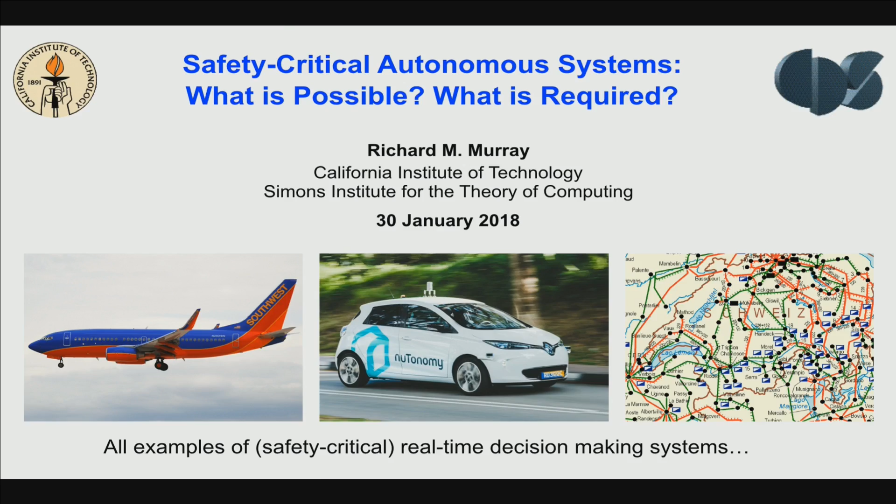I want to talk a little bit about these, and for me, part of the motivation — those of you who've seen me speak before have heard me talk some about this — was the DARPA Grand Challenge that happened back in 2004 to 2007, which Caltech participated in with a bunch of undergraduates.

The Caltech undergraduates built this vehicle. They built several — this is Alice. Actually the first vehicle was Bob. Alice is an autonomous vehicle originally built for off-road driving, although we also used it for urban driving. It was built by 75 Caltech undergraduates from scratch in about a year and a half. This shows what could be done back around 2006, probably when this picture was taken. It consists of lots of sensing, lots of computing, lots of communications, all integrated together, lots of different programs running in a very complicated setting.

It is the precursor, or one of the precursors, to what we see now today. Many of the DARPA Grand Challenge veterans and alumni are the people sitting in the self-driving car companies, getting all of these things to work and bringing that experience with them.

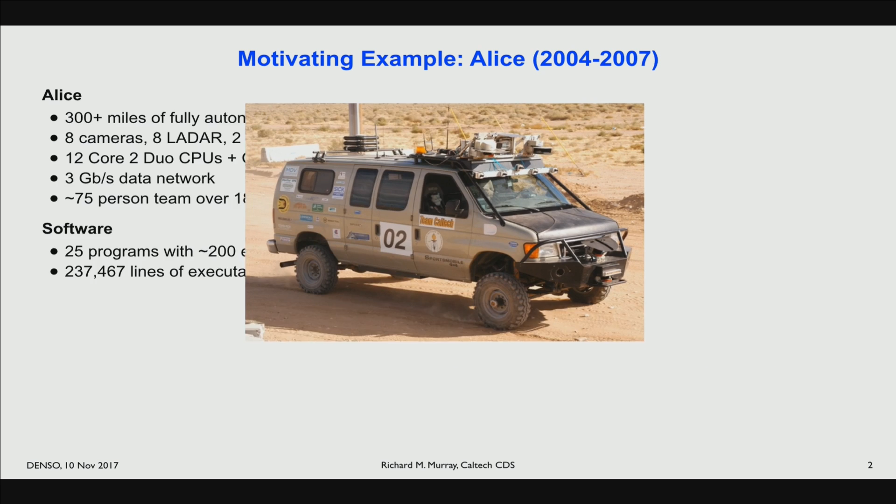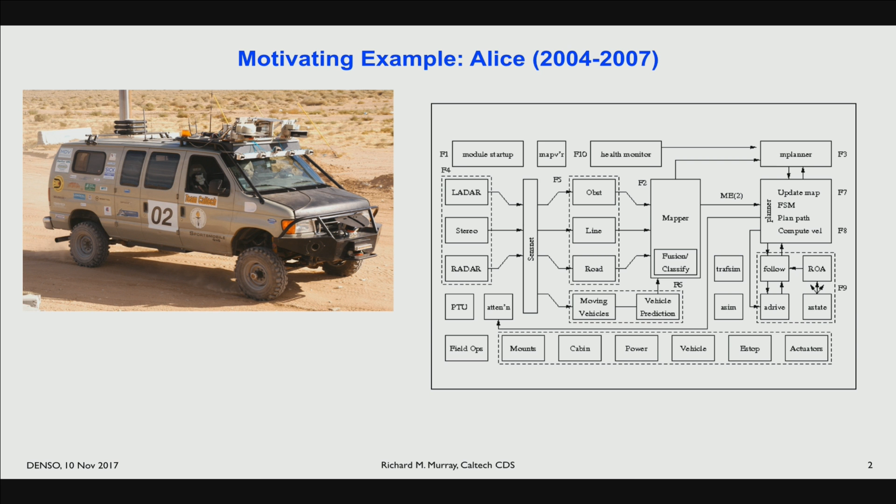So if you look inside Alice, you would see a bunch of modules running on computers. Each of these little boxes — don't worry if you can't read the words — represents some function being carried out, either sensing, navigation, decision making, or other things, all connected together, all running across 30 cores or so worth of computing and carrying out all of these computations.

This is very similar to the architectures you'd see in today's self-driving cars driving around downtown San Francisco and other places. They all have a similar setup, with lots of different computation running now on much more advanced CPUs, but still basically the same ideas. What amazed me at the time was that all of this can actually work. We actually know enough about how to get these to run.

This is an example of what Alice looked like as it was driving along. You're seeing it driving in an intersection, coming up to that intersection, waiting until it's its turn, so it has to sense those other vehicles and determine that it's now its turn to go. It goes through the intersection. It doesn't know exactly where things are, so it has to localize, figure out where the lane lines are and other things. It has no prior map, since this was before things were mapped in exquisite detail. That wasn't part of the rules, so you see it veering around a little as it tries to figure out what's going on.

It comes up to another intersection, stops a fair distance behind as set by the rules, and waits until it's its turn to go. As soon as that car goes through, it says, great, I can now pull up to the intersection, stop at the stop line. It knows the other car was there first, waits until it goes through, and then it goes through the intersection.

All of this is running with nobody in the car, having to figure out where all the lane lines are, where all the other cars are, sensing everything around it and doing real-time decision making about how to make all of those things happen. In that particular spot, you saw it doing some relatively simple maneuvers - certainly all of us could do that if we were driving a car. But now, of course, it's doing that all autonomously and working more or less correctly. You can improve the performance and other things, but it basically did what it was supposed to do. But it didn't always do the right thing.

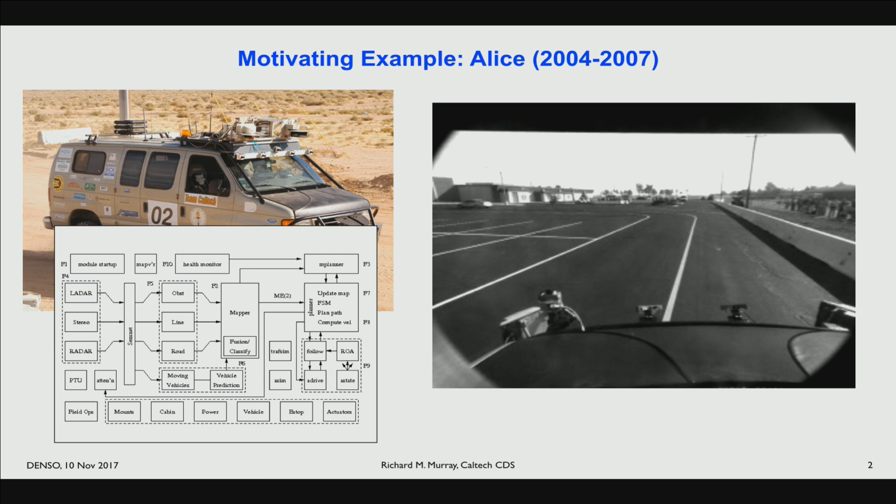What's very interesting is that if you go over to this diagram, you can say, well, something went wrong - there was a bug someplace. In fact, the bug was that there were inconsistent assumptions between two different layers of abstraction, where a higher layer thought one thing was going on and a lower layer thought something else was going on, and they got inconsistent and the system got confused. I'll explain a little more what those layers are and what was going on.

But essentially, we missed it. We did lots of driving, lots of testing, lots of simulations, but there was this one condition we'd never seen before that somehow caused the system to get confused. In a safety-critical control system, that's what you're worried about - that one condition in a million that's going to happen. You have to simulate a lot in order to get that condition, and you may never get it. That was the type of thing we were looking at.

And to me, at that time, that really motivated thinking about how in the world are we going to design these sort of complex systems and get them to work. So how do we design systems of this complexity? How do we make sure they function as they're desired?

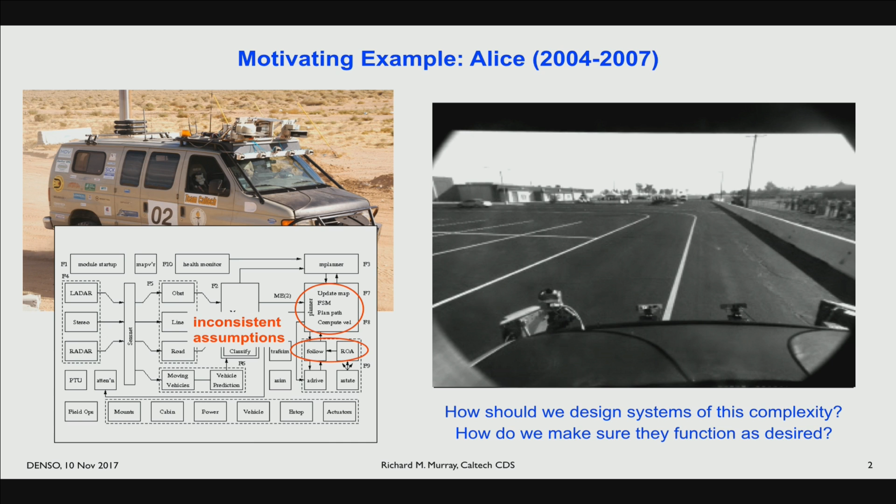Let me generalize that a little bit and talk about safety critical autonomous systems, mainly autonomous vehicles, but as I said, the power grid and other things might be there. And I think one question we should ask is, how safe is safe? How safe do we need things to be?

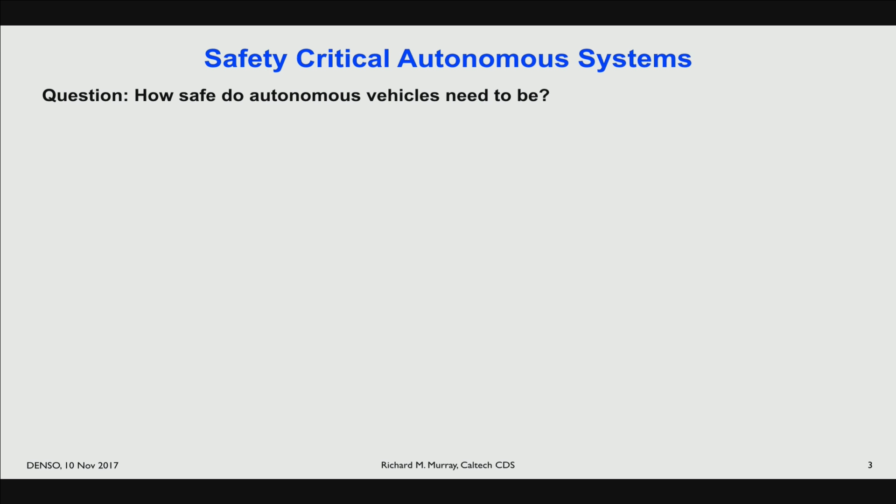So, for example, we can look at what some of the statistics are on safety in the current systems that we have. Vehicles, human-driven vehicles, the safety record is about 7 deaths for every billion miles driven. That's about what a human can do right now. Traffic deaths due to an accident, either of the people in the car or people around the car.

So that seems maybe pretty safe, right? Nobody here drives a billion miles. So 100 million miles, you would kill less than one person. But there are a lot of miles driven. So in the United States, that turns out to be 35,000 traffic deaths per year, just in the US, because there are that many miles driven. And that's certainly way too many - a leading cause of death, in some sense, up there on the list of things that kill people.

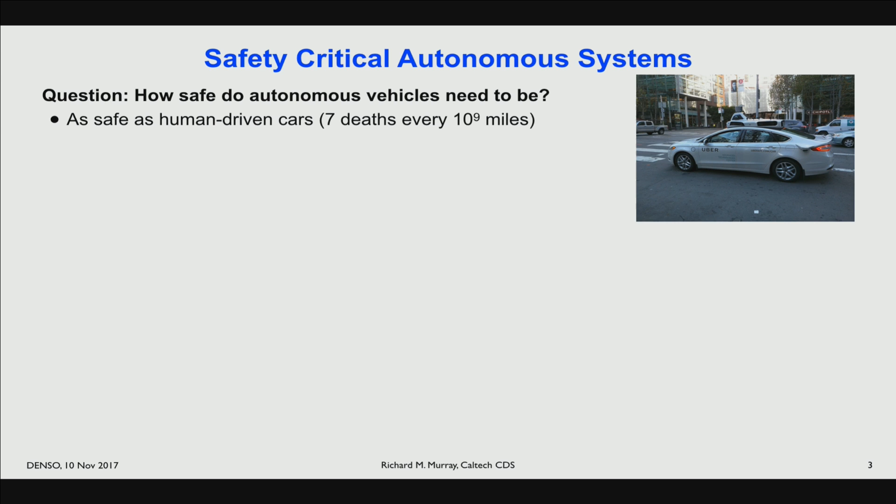So are there safer ways? Well, you can look at what happens in train and rail types of systems, something like the San Francisco Metro as an example. Buses and trains turn out to be about 20 times safer - 0.1 to 0.4 deaths per billion miles driven. Really quite a lot safer than driving yourself.

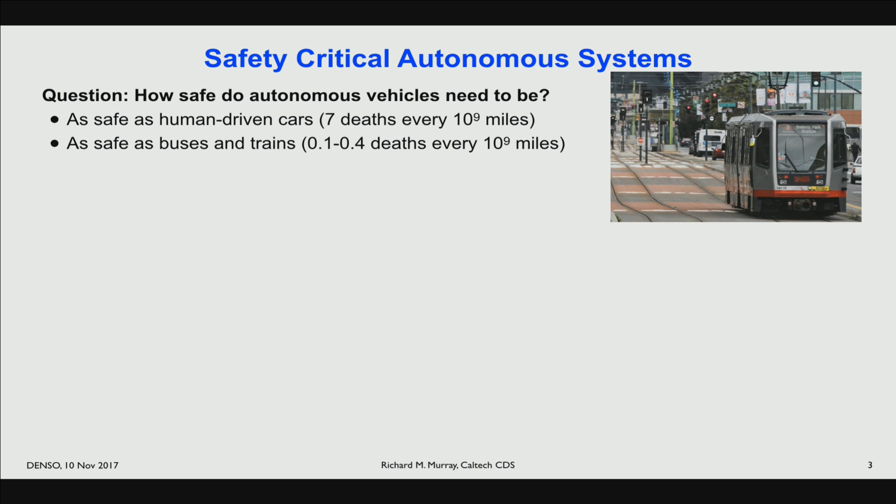But the safest mode of transportation, maybe not too surprisingly, since this is the one we hear the least about people getting hurt in, is in fact air transportation. And the statistics there are 0.07 deaths per billion miles. It's 100 times safer for me to fly from Pasadena up to Berkeley than it is for me to drive that same distance. So if you want to go down to LA or up to San Francisco, you should fly if you're worried about your safety, because it's 100 times safer to do that.

And these statistics come from this paper. It's a little bit dated now, but it goes through all of those things. And this is US data. So I think we can ask a couple of things about that. How is it that in the aerospace industry, we're able to make things so safe? What's going on there?

I think there are a couple of things. One is that there are very strong certification requirements. You can't just put software in an airplane and try it out - you actually have to go through a certification process. There are many of them, but one is called DO-178C. And DO-178C establishes how safe, as an engineer, you have to guarantee your software is, or demonstrate that your software is, before you're allowed to put it out in use by the public.

And there are a variety of levels of safety. So there's hazard classes and what's the software level for that, and the number of failures per flight hour. Catastrophic failure means possible loss of human life - the software does something and the plane might actually crash.

And for level A software, where the failure of that software could lead to a catastrophic error, what you have to demonstrate is you will have no more than one failure in every billion hours of operation. A billion hours of operation turns out to be 100,000 years. So every 100,000 years, your software is allowed to have a bug that trips. That's pretty damn safe. But that's what you have to demonstrate.

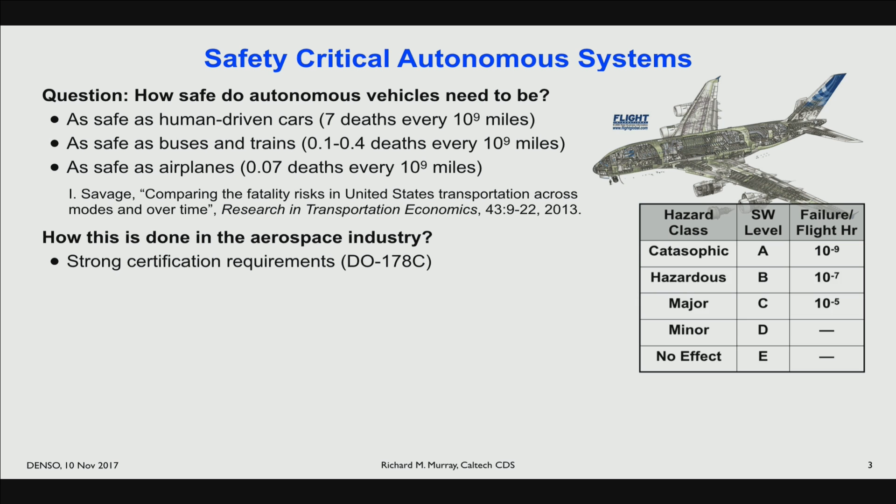And so there are a variety of processes for doing that. This DO-178C covers a lot of how you actually demonstrate that - what type of analysis you have to do, all of those things. So part of the reason that aircraft systems are so safe is that there's strong regulations around those that force the engineers designing them.

Many of these were things developed by the industry, because you obviously want airline safety to be something the public can trust. So that's kind of where we've ended up on that.

But there are other things that make the air traffic system particularly safe. It's a very structured operating environment. You have air traffic control and other things moving things around, and very well-trained personnel. A pilot gets hours of training, many hundreds of hours probably every year, in addition to flying and getting certified.

And you have very expensive vehicles. Airplanes are not cheap, maybe on the order of $1 million per passenger. So you can do a lot, and I'll tell you some about what those things are.

So if we think about it, it's possible to design these systems to be that safe. We've demonstrated we can build them that safe. How might we do that in the automotive industry? Can we get to that level of safety?

At the component level, things are actually pretty good. Your car components don't break in a way that causes death very often. Most deaths are caused due to the humans driving them making a mistake, not due to your engine going out or your tire going out or something going out inside your car. Sometimes, but not that often.

If you start thinking about autonomous vehicles, right now a lot of the backup that happens when you have a failure is the human. Oh, my tire went out, I need to pull over to the side of the road. Oh, my engine stalled, I need to figure out a safe path, all of those things.

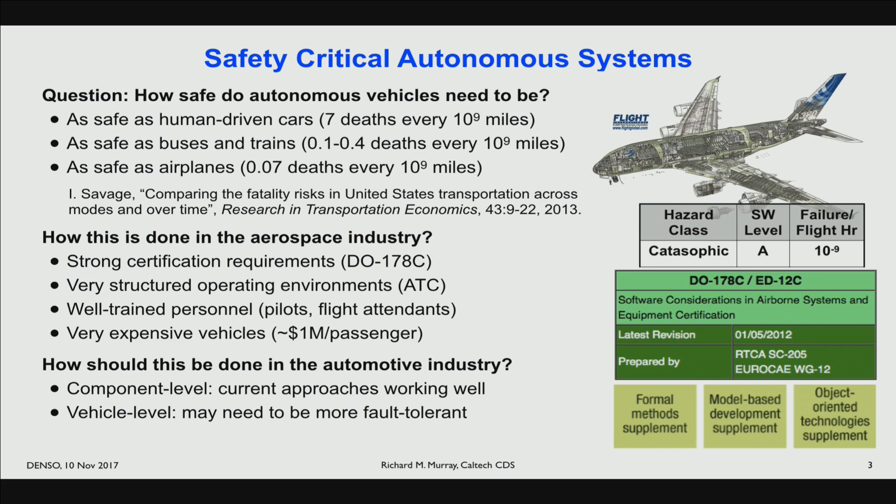So as we start doing that in autonomous vehicles, at the vehicle level we're going to have to be a little bit more fault tolerant. Most of the autonomous cars out there driving right now are designed to drive when all four wheels are inflated and the engine's running and the brakes are working and the transmission's working and the communication systems are working and the networks are working and the computers are working, and all of that stuff.

So we're going to have to say, okay, what if that's not all the case? Your aircraft can run on one engine, actually they run on zero engines for a little while. So they've thought about how do you run in fault conditions, not how do you just say, okay, it's a fault condition, I give up, everybody's dead, or it's a fault condition, pilot, figure it out. The aircraft can actually still continue to operate.

And I think the hardest thing we're going to see in automotive systems is at the system level, when you're around people and it's a mixed environment and all of that stuff is going on. That's going to be the really hard problem where I think we have very hard challenges.

So these are the types of things I've been thinking about for the last couple of years, in some sense motivated by the DARPA Grand Challenge, but increasingly for me it's been more on the aerospace side that we've applied some of the ideas I want to tell you about.

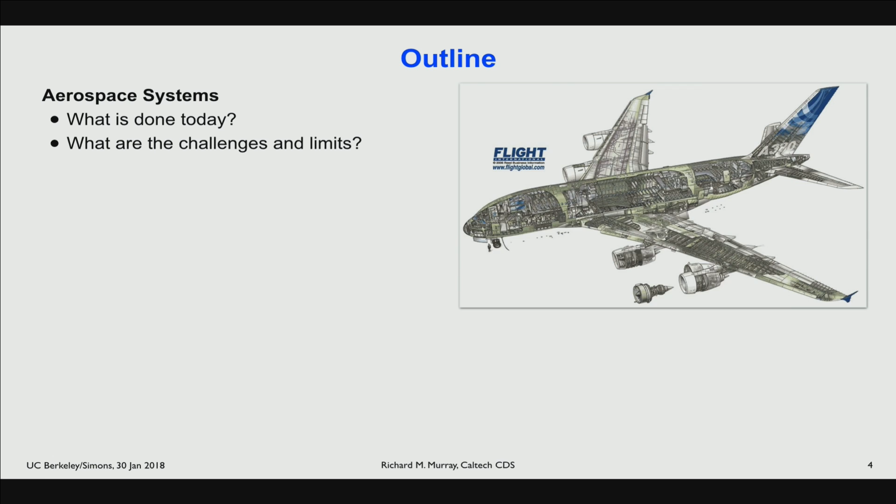So what I want to tell you about today is a little bit of that. I'm going to start by telling you more about aerospace systems, how things are done there, and what are some of the challenges even in aerospace systems that we're working on. I'll give you a sense of some of the ideas mathematically and in control theory, which is my field, and what tools and techniques we can apply. It's a very nice combination of ideas coming from computer science, controls, and many other disciplines.

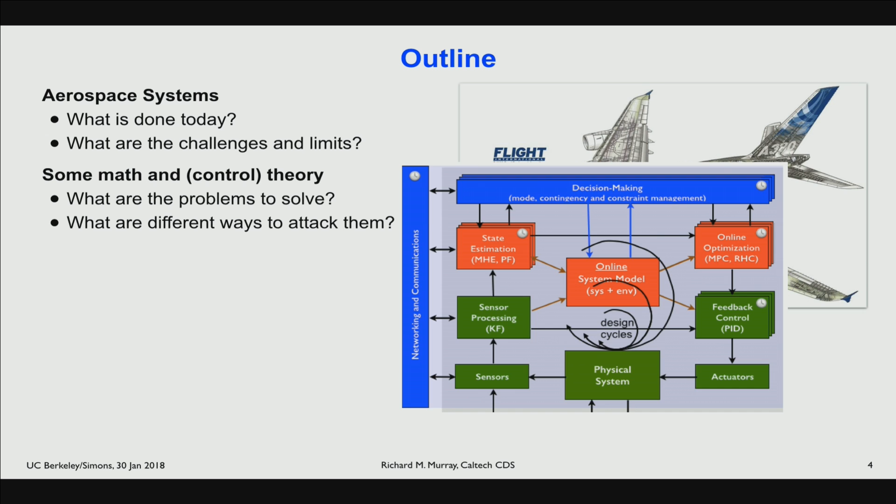And then at the end of the talk, I'll try to come back to self-driving cars and talk about whether these ideas can be applied, should they be applied, how might they be applied, what does that look like. Because this is an area that's changing very rapidly. Since 2007, there have been dozens of companies that have come out that are now building these cars.

I'd like to point out that a lot of the work I'm going to talk about today is tied to things going on here at Berkeley. In particular, a lot of the aerospace stuff is from the iCyPhy project, done with Edward Lee and Alberto Sangiovanni-Vincentelli. And a lot of the self-driving car work is stuff we've just started in the last year or so with Sanjit, Claire, Ruzena Bajcsy, Shankar Sastry, Tom Griffiths, and Bjoern Hartman here at Berkeley. So this is very much joint work with many people around here.

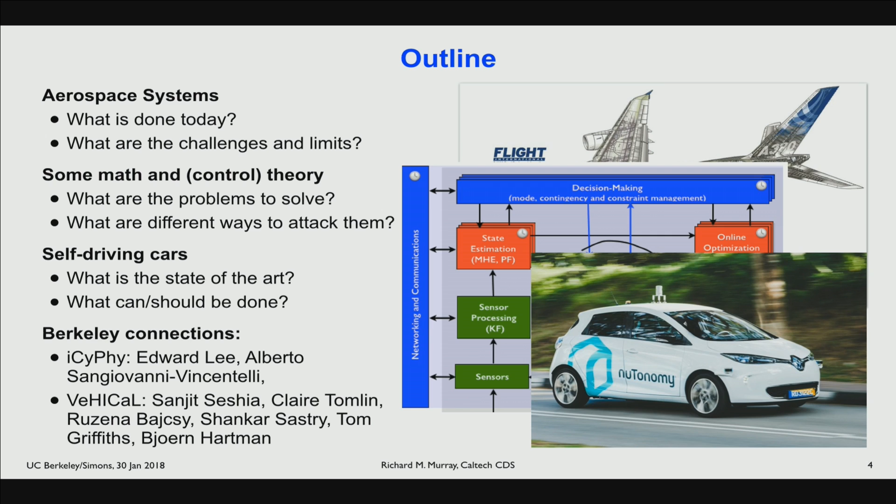Okay, so let me start. I'll say a little bit about aerospace systems and try to give you some insights about that industry, then say a little bit about the mathematics and control theory behind this, and then come back to the self-driving case. So how do we design complex aerospace systems? We use a model-based development process.

That's the current industry standard, MBD. Traditionally in an aerospace system, you'd have a design V. You'd start at the system level: I'm going to design the aircraft, how big should the wings be, what should the range be, etc. Then take this down to the subsystem level: an electric power subsystem, a propulsion subsystem, a hydraulic subsystem. Then eventually down to the component level: gears, valves, transformers and other things. So you flow everything down, and then put it all back together and verify it as you go back up.

So you take all your specs at the system level, those translate to specs at the subsystem level, those translate to specs at the component level. You design the components, put them together, test to make sure the components satisfy their specs, put them back together, make sure the subsystem satisfies the specs, put it together, make sure the system satisfies the specs. And that has worked very well in the aerospace industry for a long time, developed when things were relatively simple.

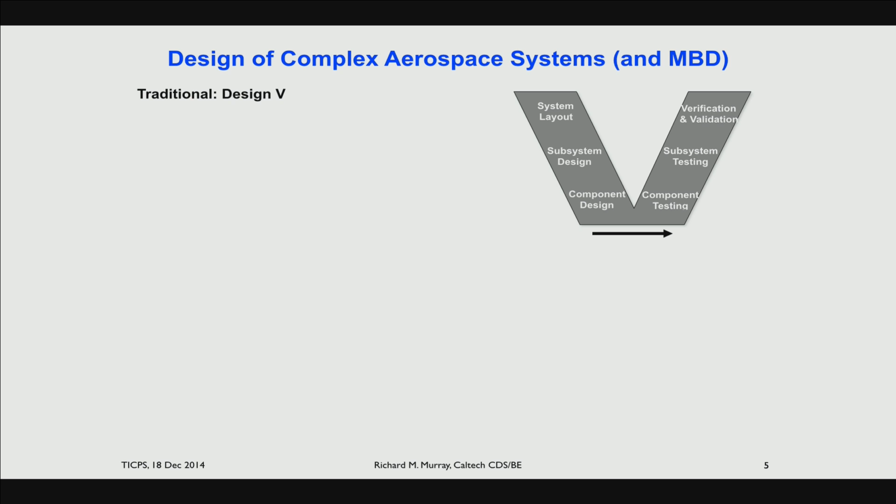And you've got 2 engines, a backup generator on each engine just in case the primary generator fails, maybe some battery backup, an auxiliary power unit - some redundancy built in there. It's relatively easy to make sure this system will operate through faults - if one engine goes out, you'll still have electrical power. You've got a similar problem with propulsion - do I have enough propulsion to take off and land and other things? But just on the electrical power side, you have to worry about that too.

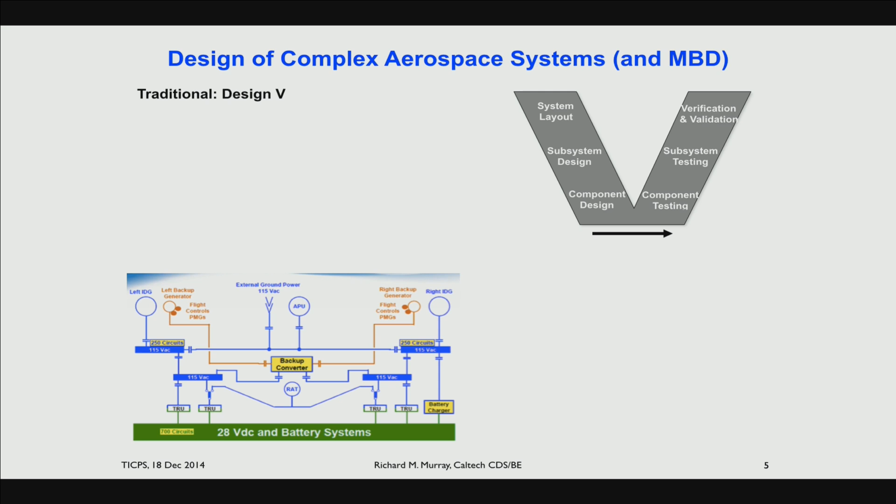It gets more complicated when you try to get more efficient. The problem with this system is that you're basically carrying around 2 to 3 times the power generation capability you need, just to make sure it's always there. As you try to optimize and get your airplane more fuel efficient - meaning lighter weight - and lower cost, meaning fewer components, you start asking: do I really need a left backup generator and a right backup generator? Do I need each one to be able to power up the entire aircraft? Maybe there are 4, 5, or 6 sources - a battery backup, an APU, left 2 generators, right 2 generators.

Can't I assume that 3 of the 6 of those are running, and make sure that no matter which 3 of the 6 are running, they have enough power? And if that happens, the likelihood that 3 of them fail is less than 1 in 10 to the 9 flight hours. I ought to be able to get away with that. But now the problem is that it depends which 3, and how things are connected up. So I start having to worry about how to route power in more sophisticated ways, because I don't know what's going to be up and down. So you get a more complex system to do that.

So these systems have gotten more complex as we've tried to make them higher performance, lower cost, higher availability, lower weight - all of these design challenges. And this is very much a software-controlled system, because now all of the contactors that route power this way are all controlled by a microprocessor someplace that's saying, oh, this engine just went out, so now I need to reconnect the power and reflow it in order to make sure the right stuff gets the right power.

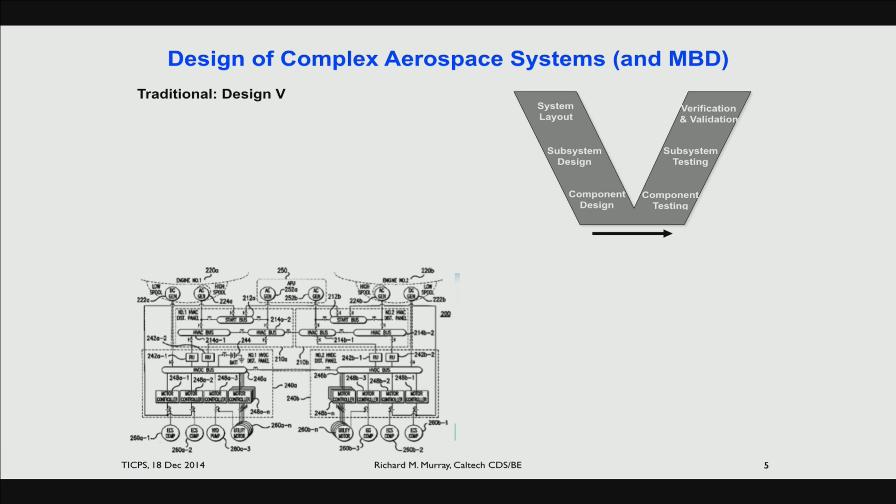And so the challenge with these complex systems in the aerospace industry, what are they struggling with? They can build systems that are as safe as they need to be, but it is very expensive to do so. And part of the reason it's very expensive is that you discover changes downstream.

And that's very expensive, right? Because now you've already built the thing, you've already sized all the components, you're partway back up that V. And so it's getting very complicated to change things and go back and do everything. So that's the challenge in the aerospace industry - these things are too expensive, time consuming, and they get delivered late. And you hear this with all of the aircraft that come out, that it's over budget, over time.

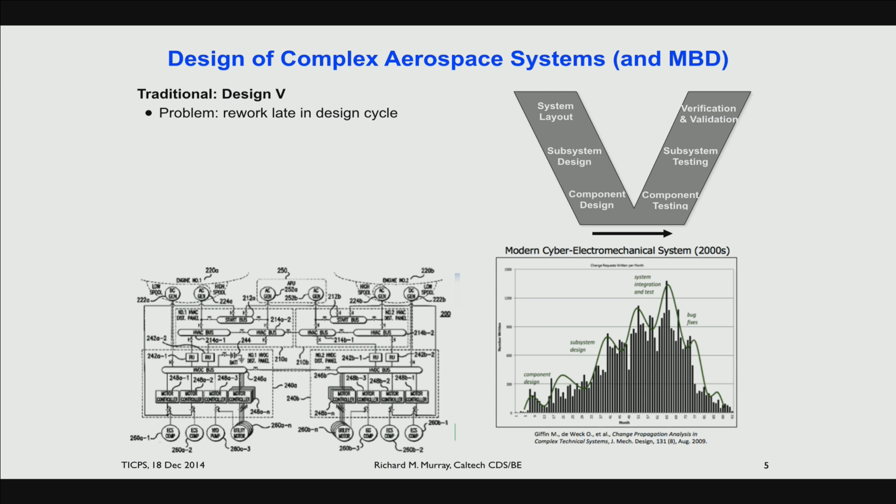This is cutting into the business, et cetera. And so in the aerospace industry, people have thought about, well, how do we do better? And one of the ways we can maybe do better is to use models in a better way, and to try and do more upfront. So take this design V, and instead of waiting until we're going back up the design V to discover problems, try and do more on the front end. Do little verification loops, make sure everything works, have tighter specifications and other things, use formal methods and other ideas that I'll talk about earlier in that design process.

And can we, by doing that sort of thing, shift this curve so that maybe we get the same number of change requests? Maybe we take that as a constant - we're doing a design, we're going to get things wrong - but can we shift it so that those change requests, the area is the same, but they come earlier in the design phase when it's cheaper?

And so this is where the aerospace industry is going - how do we pull up those changes so that we can discover them earlier, ideally while we're still doing stuff on paper, or in simulation, or in very early prototyping rigs rather than on a full aircraft. So that's kind of where things are going.

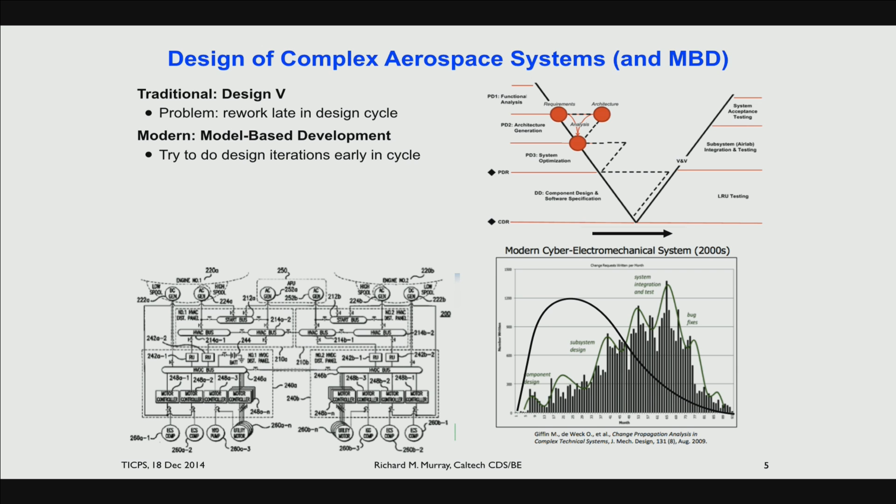The difficulty is this is hard, and there's more research needed to figure out how to do that. So there's a lot of things that people are trying to figure out, verification of these sorts of things, et cetera. I'll talk more about these. But model-based synthesis is one of the things people are doing.

So we need to design with downstream verification in mind. We need to think about going from a design-then-verify sort of mentality to more of a specify-then-synthesize type of mentality. I'll talk more about that in a second.

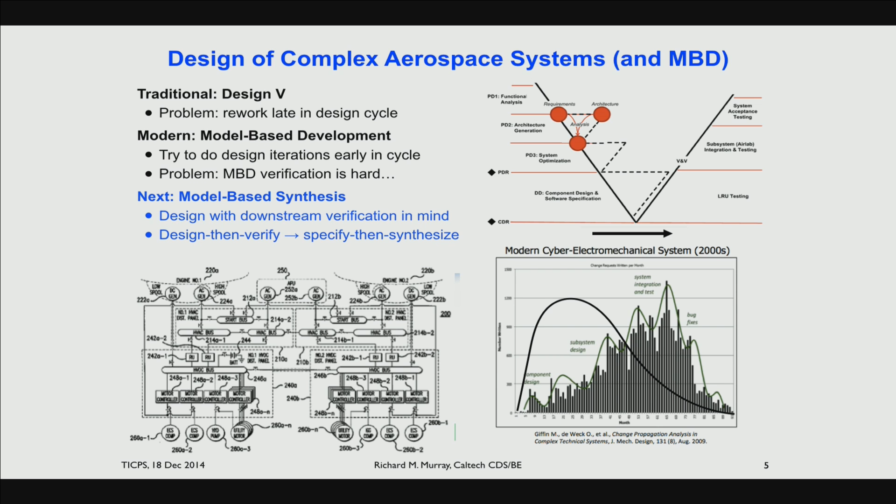Now, just to show how some of these things all play out, let me give you an example. When you look at a modern aircraft, it's got a lot of subsystems. If you peel away the skin, not only do you see the seats and everything else, but there's wiring running all over, hydraulic pumps all over the place, cables and everything else, and we've got these tight design specifications.

And as I already mentioned, for catastrophic failure - anything software controlled where the software going bad could lead to loss of life - we have 100,000 years that we have to demonstrate. Just in the US, there's about 30,000 flights a day, which turns out to be on the order of 10 to the 8th flight hours per year.

So if you look at the world, there ought to be maybe one every year or two software problems that lead to planes crashing. And that's about what happens, right? Every year or two you hear about that Air France flight, or that Malaysia Airlines flight, that sort of went down and we don't know quite why - it might have been part of the software. So that's kind of the level that we're at, pretty much at that level.

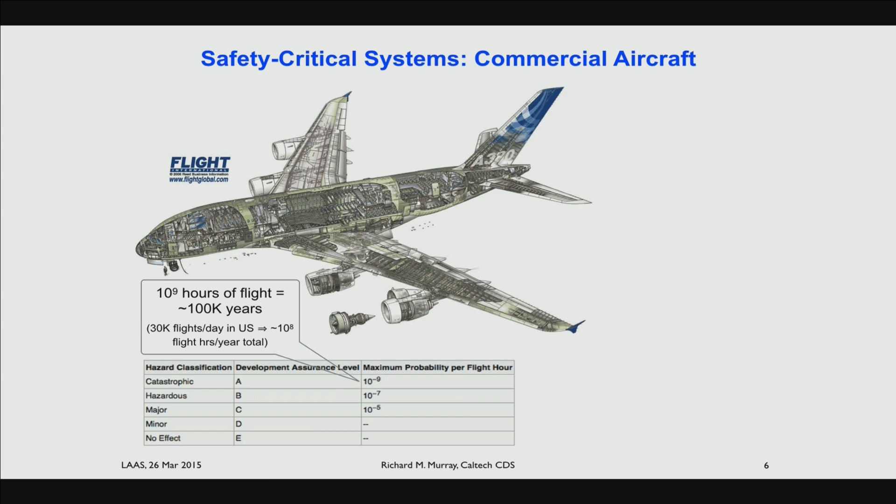And if you think about what these systems have to do to maintain that level - let me take the example of the 787 power bus, or something like it. What you're seeing here is across the top are the sources of power: 2 generators on the left engine, 2 generators on the right engine, a left auxiliary power unit, a right auxiliary power unit.

There are batteries in here that aren't shown. There are high voltage AC buses, low voltage AC buses - why? For efficiency, because you don't want everything running off high voltage AC. Some things run more efficiently off low voltage, so you put more buses in. There are high voltage DC, low voltage DC - again for efficiency. There are transformer units.

But look at all the paths between all of those things - there are lots of different ways of powering them up. So what happens in the software running this is that in normal operation, everything's functional, so you want to use the most efficient way of routing power. So you might say, okay, my left and right generators are running, so I'll power up all of the buses in some way.

Those are the long rectangular things. I've highlighted the paths of power being used, so everything should be getting power from something, although I think the middle buses there are unpowered somehow. Anyway, sorry about that. Now, that's the normal operation, but we know these generators aren't going to run for 100,000 years without failing - you're going to do maintenance on them, but at some point one of them's going to fail.

So what do we do when, for example, that fails? Well, when it fails, the buses that were getting supplied by that can no longer supply power, so we need to reroute that power. The first thing that happens is we lose power on all of those buses because that's what was getting driven off that particular bus, and we need to repower them.

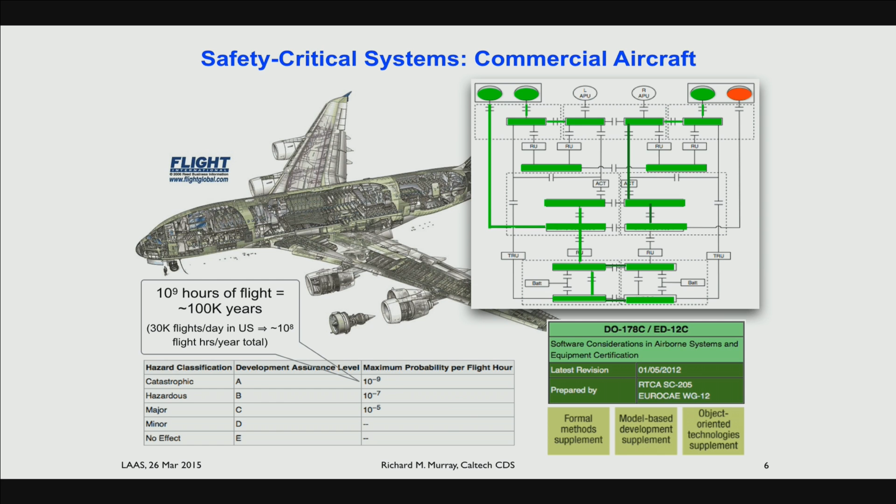So I'll give you an example of where that challenge can be seen. This is in a test flight for the 787, basically the system I've been showing you. It's called ZA002—the flight number there is a test flight. This happened back about 7 or 8 years ago, on the 787.

So this is an article, and you can see the title: Official Word from Boeing, 787 Dreamliner Fire and Smoke Details. Okay, that's not good—fire and smoke in an aircraft, right? Not what you want. You can't read the text here, so I'll pull out a little bit of it.

What it says is that there was a loss of primary electrical power. Okay, well what does that mean? Primary electrical power is the thing that powers the aircraft. So really what happened is that the cockpit lost power. You're looking at a bunch of computer displays and they go off, okay? You are now in a plane flying.

This was actually a plane coming in for a landing, so it's probably at 10, 15,000 feet. It's coming in for a landing and all of a sudden all of the cockpit displays go off. And all of the computers that allow the stick and rudder and other things to control something have also gone off. That's what happens when primary electrical power goes off. Not good.

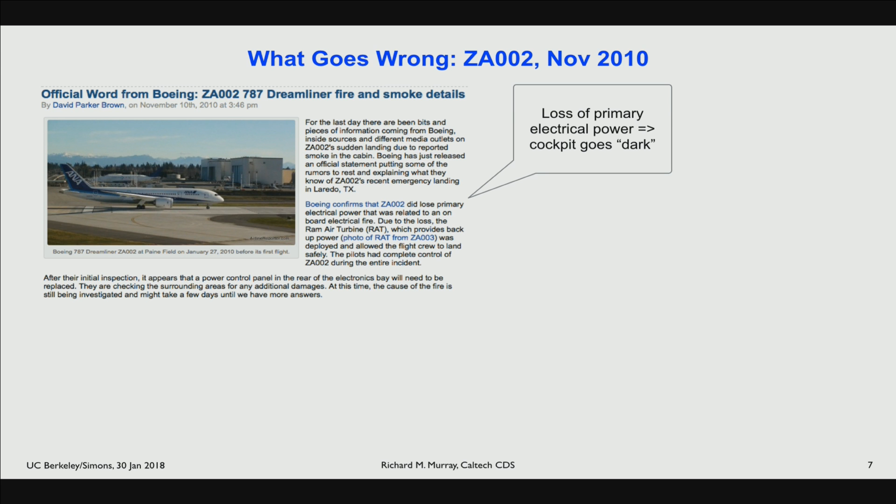So first off, that should never have happened. That should be a one in, all right, sort of 10 to the 9th flight hours thing. This is a test flight. Sort of—what in the world went on? Okay, so something went wrong and something didn't happen.

But engineers are really careful about things. And so, in fact, if you keep reading, what it says is that the RAM air turbine, the RAT, deployed and allowed a safe landing. Okay, so chances are, unless you've heard me talk before or you're in the aerospace industry, you have no idea what a RAT is. The RAM air turbine is something that is underneath virtually every commercial aircraft. There's a picture pointing to it.

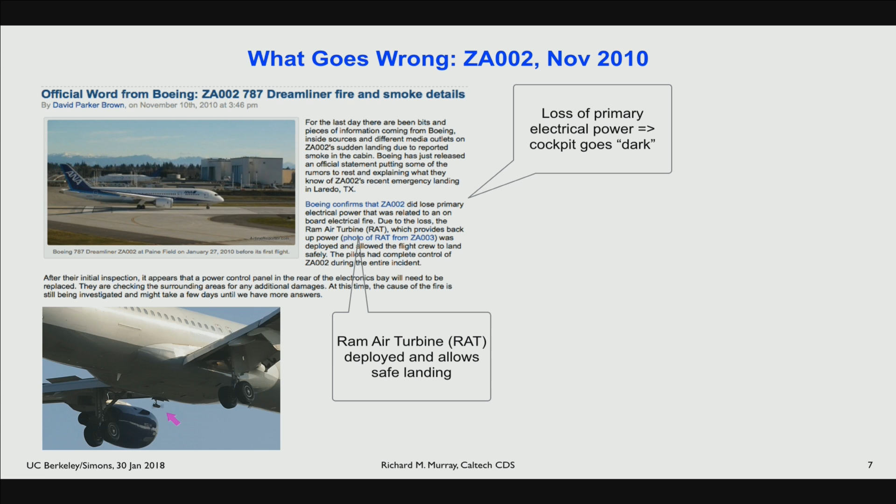You can barely see it down there, so let me blow it up a little bit. It looks like this. It's basically mounted up underneath the fuselage, and it's set up so that if you lose primary electrical power or primary hydraulic power, this thing will automatically drop down into the airflow. There's a prop on the front of it that starts spinning.

That prop does two things. It spins up an electric generator and it spins up a hydraulic pump. Those go to completely separate circuits that power up the flight control computers and the primary flight actuators. So some engineer someplace said, yeah, but what if the software doesn't work? If the software doesn't work, I want to have a whole separate redundant circuit. That's how you get that 1 in a billion sort of case in there.

And so that RAT deployed as they're coming in, within, I don't know, 30 seconds or something like that, everything comes back up. So they had to fly kind of open loop, really open loop for 30 seconds, and then everything comes back up, and then they've got only what they need to land the plane. So they land the plane safely. And you didn't hear about people dying or other things, because that safety system came in. So that's an example of the types of things that our engineers are doing.

Just to give you a sense of all this, part of the reason you never heard of these RAM air turbines is they are very rarely used. There are about 100,000 flights a day globally. That means 35 million flights per year. I was able to find 6 documented RAT deployments where somebody wrote an article saying here was a RAT deployment. Now, not all of them are going to get published, so maybe there were 10 times that many. That would be about 3 per year on 35 million flights. So 1 in every 10 million flights, this RAT will deploy.

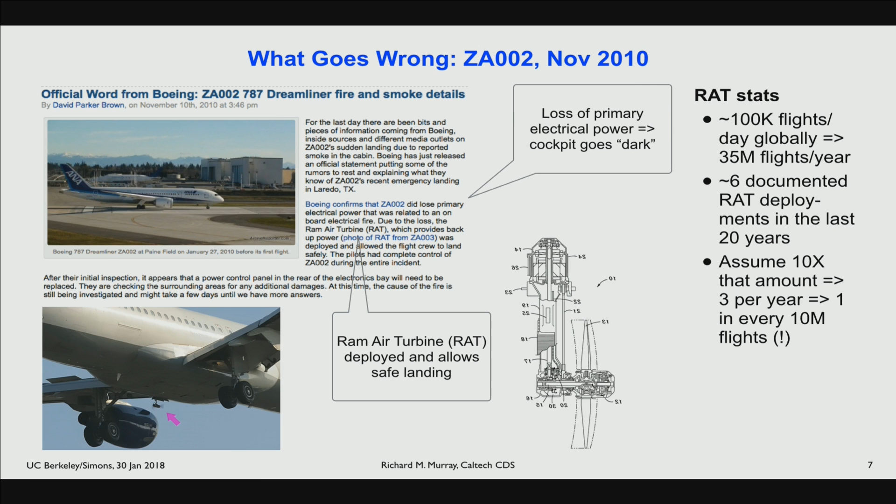How do you verify that it does the right thing in all the right conditions, et cetera? I've actually been to the manufacturing floor where they build these things. They actually have a poster for every time the RAT deployed, with the number of people whose lives were saved because their system deployed. Because if their system hadn't deployed, that plane wouldn't have had any power and would have crashed. So that's the type of thing I think that when you think about safety critical systems, that's the sort of mentality you want to have. Like no matter what happens, we've got a way to get out of that thing. So that's the type of thing that's going on.

Okay, so with that, that's sort of how aerospace deals with this thing and a little bit of the mentality of those things. Let me tell you some about where aerospace is going and the types of things that people are trying to do.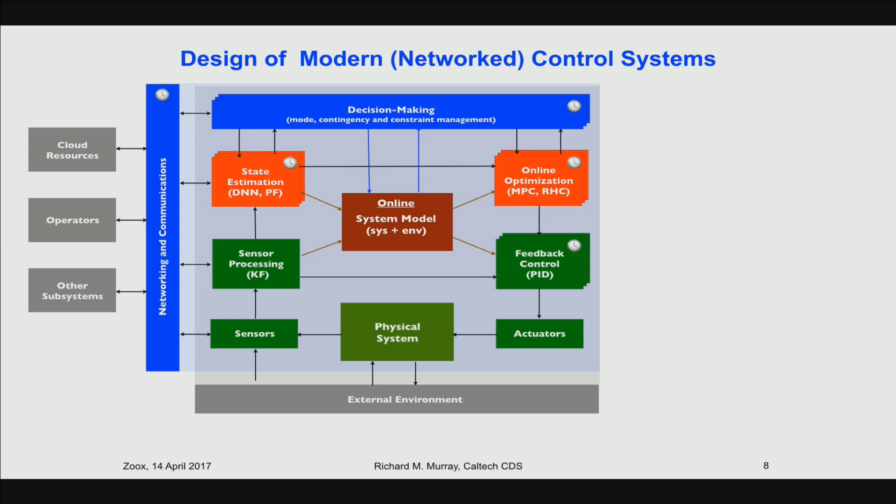So we have to think about how we manage all of this complexity. We can do that in the usual ways we've learned from places like computer science: via abstraction. We can say there are layers of abstraction, and I want to separate those layers so that some engineers worry about what happens at the lower physical layer, another group at the control layer, another at the optimization layer, and another at the decision-making layer.

We often also decompose this when you look at teams working on this. You'll have the sensors guys over on the left, the controls guys or hardware actuator guys over on the right, the optimization people, et cetera. These are all ways that we divide this problem up.

And I'll tell you, my own experience has been that's where most of the errors occur—between these layers. The assumptions people make on the two sides. Remember, I told you that was the problem that went wrong in Alice, when it backed up in the middle of the intersection—there was an inconsistency in the way two different teams were thinking about the problem. Same thing: the sensor guys think one thing's going on, the optimization guys think a different thing's going on, and we don't get it right. But nonetheless, that's how we design these systems.

One of the ways we can try to combat that is to use contracts. I'll say more about what those are, but assume-guarantee contracts specifically. We also have to worry about not only vertical layers of abstraction and vertical contracts that connect the different layers, but also horizontal contracts. So now I've put these little arrows in there.

As we distribute these systems, we have to know how the other agents are going to behave, if it's a multi-car system or something like that.

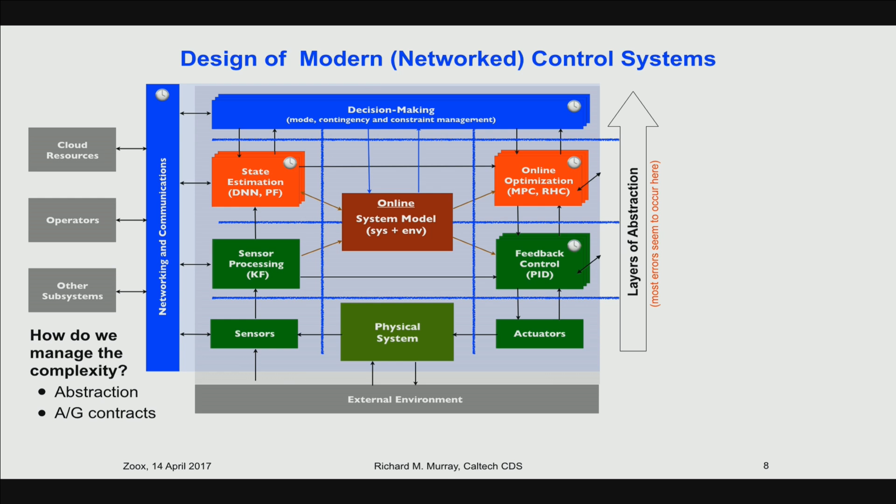One of the things we've been doing, and trying to get the aerospace industry and increasingly the autonomous car industry to use, is to get more formal about the use of verification and synthesis in both model-driven and data-driven simulation and testing.

There are lots of systems where this sort of picture shows up: aerospace systems, self-driving cars, factory automation, process control, smart buildings, smart grid, smart transportation systems, mobility—things we're looking at in this real-time decision-making program very much look like that. And there are lots of challenges around all of this.

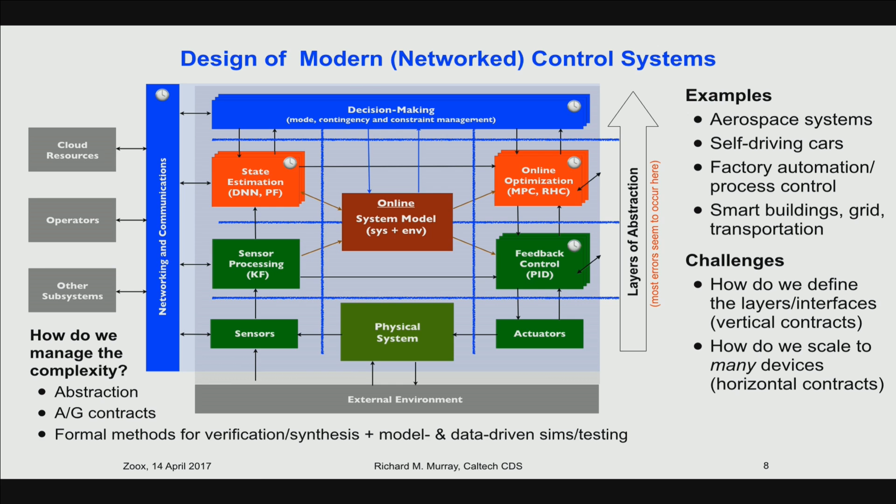How do we define the layers and the interfaces? That's the vertical contracts. How do we scale to many devices, like Internet of Things or mobility systems? That's the horizontal contracts. And how do we keep in mind all of the properties we care about—stability, robustness, security, privacy, all of those things? It's a nice, rich space to think about what can be done.

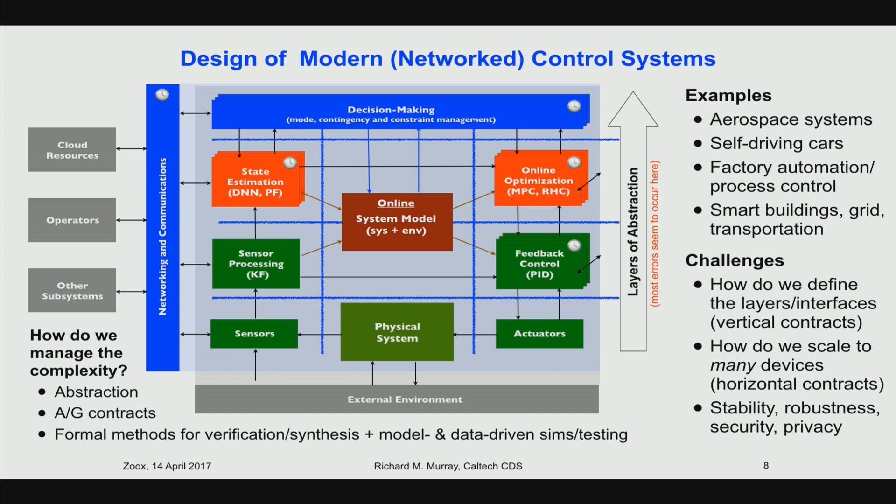I want to say a little about specifications, since that's something we've been putting a lot of time on. When you think about specification, you have a bunch of properties over here on the left—things you write down, saying these are the properties I'd like to be true.

We like to break that down into a contract, something implementable with an assumed-guarantee framework. We usually write that in temporal logic or some other formal mathematical language, which lets us implement things on components so that when we synthesize something satisfying the individual contracts and compose them, we know it works correctly together.

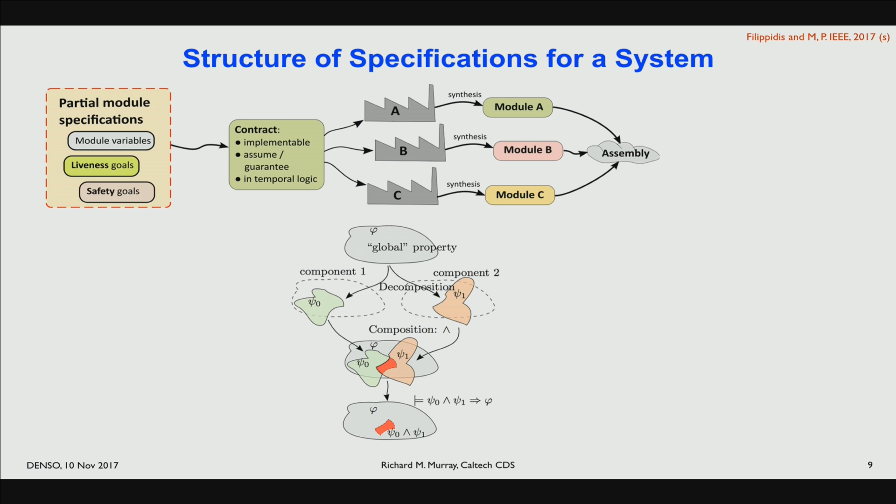Pictorially, you have some global property, and you want to break things up so this component satisfies this set of sub-properties—a contract—and this one satisfies these. When I compose these two things, I get a combined behavior that sits inside my global set of properties, because the composition constrains each other, so that working together they give you something that works correctly.

If you do that right, it gives you flexibility because it essentially gives you modularity. If I have component A satisfying its properties and component B satisfying its property, I know that composing them means the subsystem satisfies the intersection of those properties, and the subsystems, when intersected, satisfy the global one. Now you can change component A or B as long as you satisfy your contract, so different companies can do things differently and come up with new innovations, but those contracts ensure that when you plug it in, it works the right way.

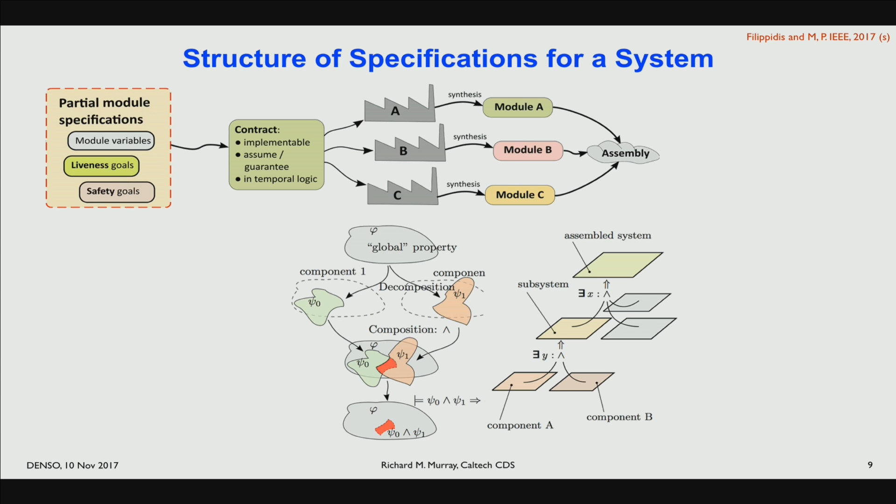Those are the sorts of things we'd like to look at. In this assumed-guarantee form, we assume the contracts hold under some assumption on the environment and what inputs I get, and I give you a set of guarantees on my performance, which can then be nested together.

For example, if I've got 3 components, the guarantees provided by components 2 and 3 should imply the assumptions that component 1 is making, and similarly the guarantees from 1 and 3 should imply the assumptions component 2 is making. So when you put it all together, the guarantees one set provides sit within the assumptions made in providing the others' guarantees, and the circularity all works out—that's the type of thing you'd like to do.

Again, these assumed-guarantee contracts can be vertical between layers, or horizontal between elements within the same layer in a distributed system. One of the things we think about is how you synthesize these and do other things.

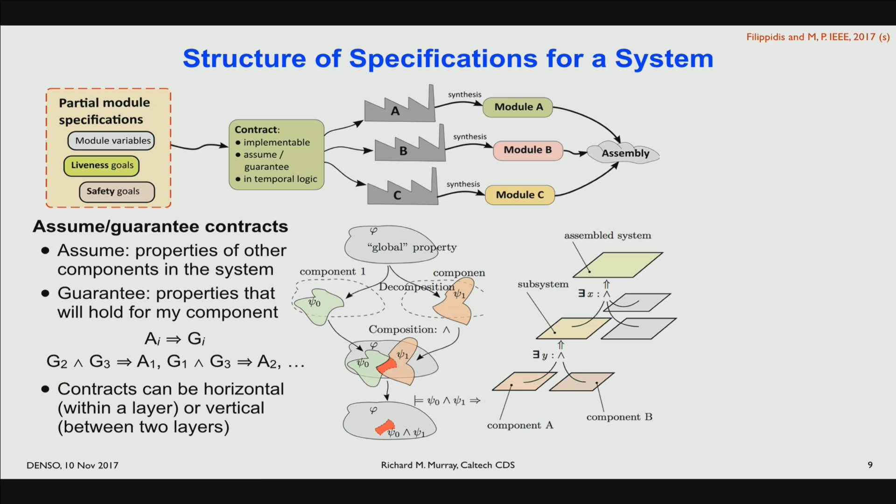Once you have contracts, you can think about how to check them. For computer scientists, model checking is one way to do that. So if I have something at just the discrete layer of abstraction—though you can make similar claims at other levels—I might have some finite state machine representing my decision-making logic.

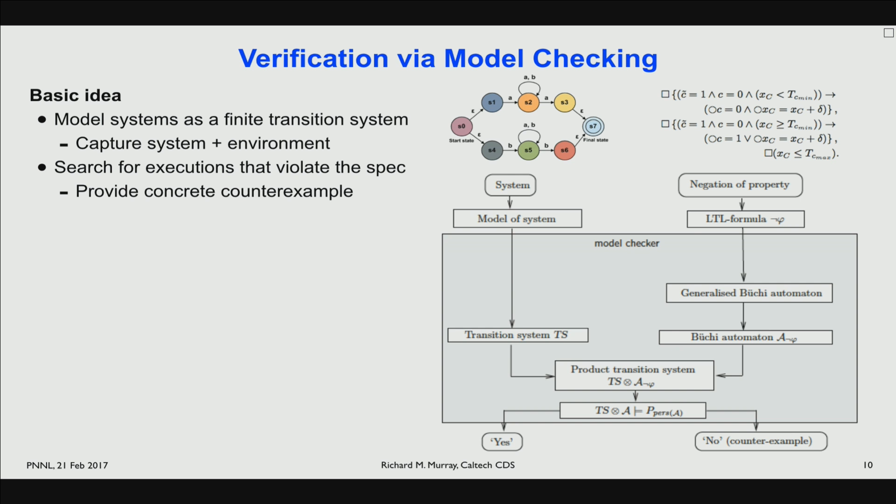I might have some formula here written in linear temporal logic. Don't worry if you don't know that. There are great tools coming from computer science that allow us to take the system description and the property, and basically go through and say: for all possible executions of this system, the specifications will be satisfied. They will formally verify, and what's important is they verify that with different interleavings on a distributed system. If one system operates slightly before the other, or a clock tick happens, they check all possible interleavings. That's very important, because in these distributed systems, that's where things go wrong.

But the other powerful thing they do is give you a counterexample if it doesn't work. They say no, this specification is not satisfied, and here's a counterexample. Why is that important? Because engineers always think they got it right, and they never believe you. Then you say, think about this - what happens if, and you show them what happened in that ZA002 flight. And they go, oh yeah, if that happens the entire primary power system could go down. You'd like to figure that out ahead of time rather than by flying it and figuring out the hard way. And that plane was basically production-ready. Since final certification they'd go back and do it. So it's really important that those tools and techniques work.

Model checkers are getting much, much better. They can check all possible execution traces. They can look at environmental actions, so you get models of what the environment can do, et cetera. If you've not used these, I would encourage you to learn something about them. There are lots of modern model checkers out there. We tend to use SPIN and TLC at Caltech. They can handle many, many states.

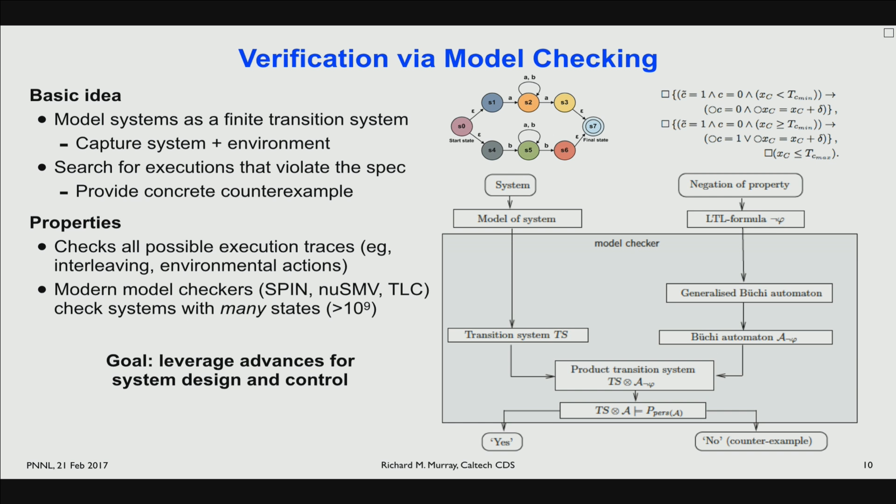The goal is that we'd like to leverage these somehow for doing control. This is an existing technology, but I think the principles of this technology have not been realized at all the layers of abstraction. So how do we do that style of model checking within the trajectory optimization layer or within the feedback control layer? I think the other thing we can do is turn that around a little bit.

If I say, look, I've got a system model, I've got some set of assumptions, a description of the environment, and some set of requirements, that gives me a model of what the system and environment can do and some set of formal specifications. In verification, we design some finite state machine that implements that decision-making logic, and then we verify that either yes, this set of properties is satisfied for this environment with this decision-making logic - so I give you basically a certificate saying you're okay - or I give you a counterexample.

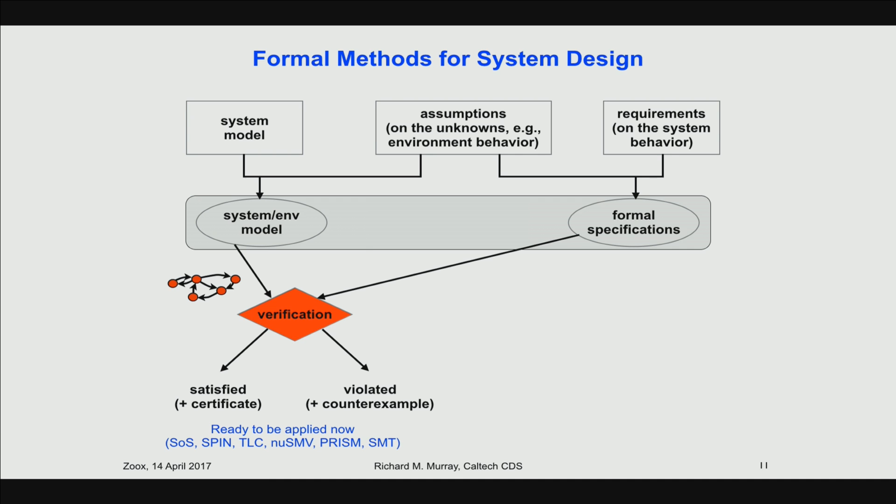But the other thing you can do is flip this around and say, well, if I give you the system model and the formal specifications, why not just synthesize the controller that does that? I've told you here's what the system is, and here's what I want you to do. Can't I write a program that goes and says, here's the logic for how to switch on and off the electric power system so that you never short two things together, and so on. And in fact you can do that - that's called synthesis, and you can do it in standard computer science settings. This has been known for a while. In control settings there are things that make it hard, but sort of doable. So this is where we've been heading, to do these sorts of synthesis tools.

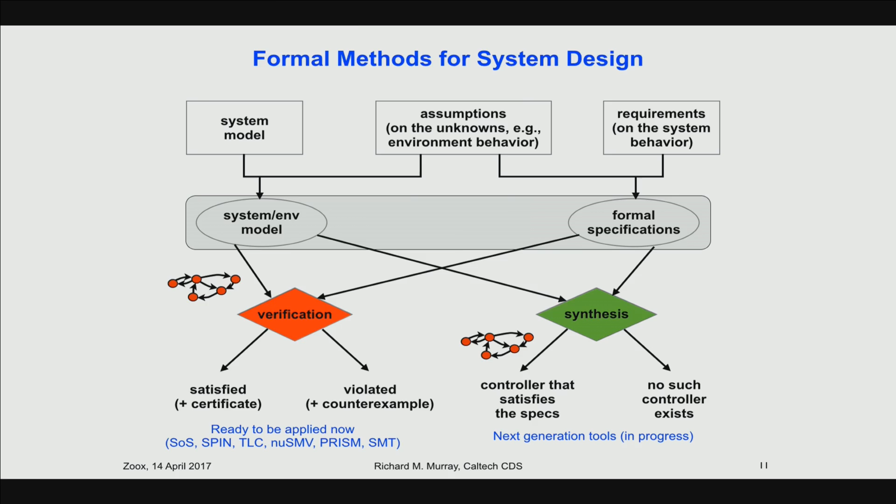I'll very briefly tell you about some of the synthesis tools before hopping back to autonomous vehicles. We're interested in what's called reactive protocol synthesis, and the diagram might look something like this. We're just at the decision-making layer, that top layer - it's all discrete, just for simplicity. I've got some process here that's the process I'm controlling, the aircraft, and I can turn on or off certain switches, connect certain buses together, if it's the electric power system. I've got some environment, and that environment's also discrete.

A contactor can fail, a sensor can fail, a generator can fail - all of those are things that my environment can do to me, and that may depend on my system state. It may be that the contactors that fail are the ones that are open or closed, more likely than something else. So my environment interacts with that. Now the controller process, the decision-making process, gets to look at the current state of the process, and in this version of things, we'll allow it to look at the current state of the environment, assuming that's known or can be inferred very quickly. And then what we'd like to do is satisfy some specification along the lines of what I wrote down.

Generally speaking, this is hard to do for general classes of specifications. In the context of linear temporal logic, a certain class of specifications, it turns out it's doubly exponentially hard in the size of the specification. So if I have 5 specifications, it'll take 2 to the 2 to the 5th, so 2 to the 32nd nanoseconds. That's a long time. But if I double that and have 10 specifications, it will take 2 to the 2 to the 10th, that's 2 to the 1,000. I worked that out, that's 10 to the 300 years - that's like the age of the universe. So that's not going to happen. Way too complex, and that's kind of stopped us.

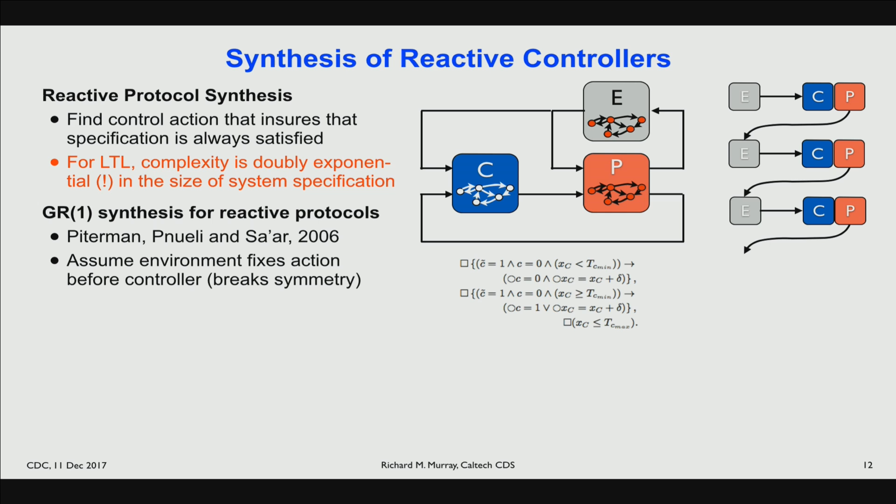If you do that, and you look at this special class of specifications, these GR1 specifications, what do they look like? In linear temporal logic, they look something like this - let me not worry you too much about it, but they basically say I have a set of safety assumptions and a set of progress assumptions. The safety assumptions are 'never do the following thing,' and the progress assumptions are 'always eventually do something over and over again.' And if I assume my environment has safety and progress assumptions, then I should imply that my system has safety and progress specifications. So if I assume the environment does something of this form, I need to guarantee that the system does something in that form.

That problem turns out to be much simpler - in fact, it's only cubic in the number of states. That's pretty good, right? Doubly exponential to cubic. Now, cubic in the number of states versus doubly exponential in the size of the system specification - there's actually an exponential factor in there. So the states to represent a system spec can be exponential in the size of the spec, but usually aren't. So it is often the case, no guarantees, that it's a reasonable number of states. And we've been able to pick up these tools that came out of work by Piterman, Pnueli, and Sa'ar from 2006 and apply them in many of these control situations.

So again, GR1 are these general reactivity formulas, and they fit within this assume-guarantee framework. That is, I might use this for the assumptions being my higher level of abstraction assuming something about my lower level of abstraction, or my lower level assuming something about the higher level, or it could be me assuming something about the environment. All of that kind of fits.

Okay, so let me just very quickly give you an example of how these synthesis things work - why does this work? I'm going to do this runner-blocker game that Pnueli came up with. The idea is I've got a runner.

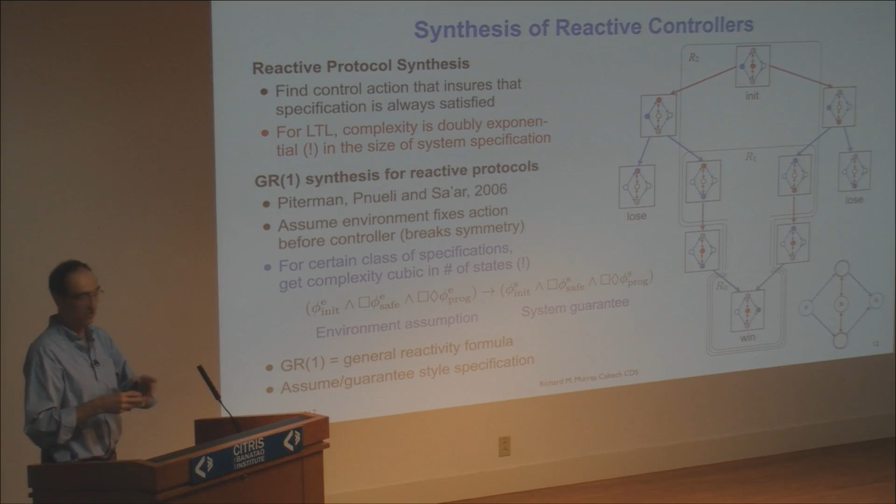So now we can just keep iterating this until we get to a fixed point, until we get no new states. And we can say that's the maximal set of states from which we can converge, we can find a path down to the winning state. And if that includes my set of initial conditions, then I win, I can win this problem.

And we can back out a strategy from that. Essentially, if I start up here, I need to get into the next set; if I start in here, I need to do the next set. So you can back out a strategy. That's how these techniques work, and you can show that can be done with cubic complexity.

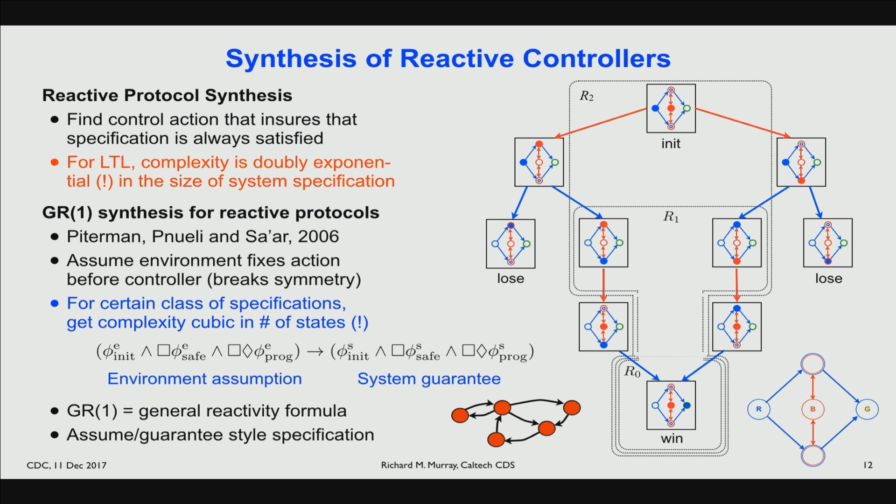So we can apply those types of systems. For example, if I go back to this electric power system, you can write down the requirements. Here's a bunch of them: no AC bus shall be simultaneously powered by more than one AC source, right? That was the thing that I told you.

Buses should be powered according to priority tables, so maybe certain things are more efficient than other things. Not unpowered for more than 50 milliseconds. So you've got all these things, and the spec that I was showing you before was implementing these. And we've got some environmental descriptions about how often things can fail, and what types of things can fail.

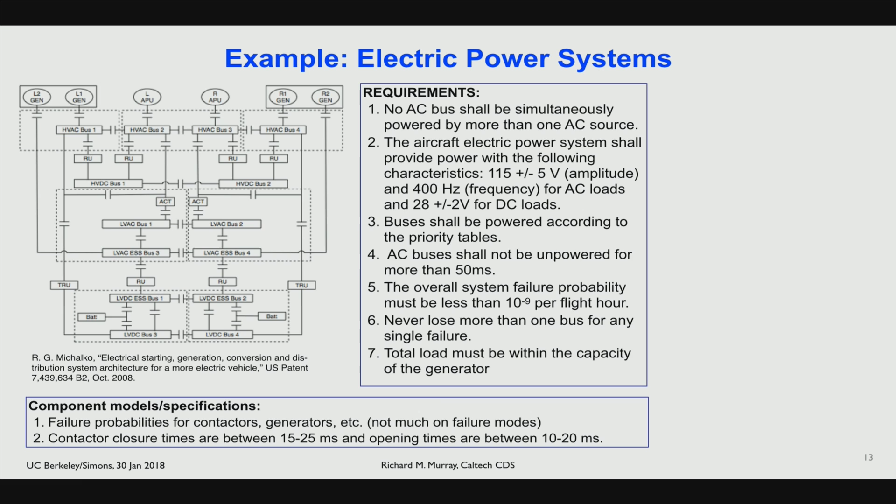And when we put all of those together, we can essentially formulate this as a GR1 synthesis problem. We can first just write down the specs, and you give me a solution, and we can verify that, in fact, that works under all possible interleavings. And this can be done—you can go and show that the failure that occurred in the ZA002 flight would be caught. We say, oh yeah, what about this sequence of events? But also, you can synthesize that logic automatically.

And that synthesis is particularly useful if you're trying to do design space exploration. What topology should I use? But that topology depends on whether I can synthesize a control law, a decision-making law, and I want to do that automatically, not by hand.

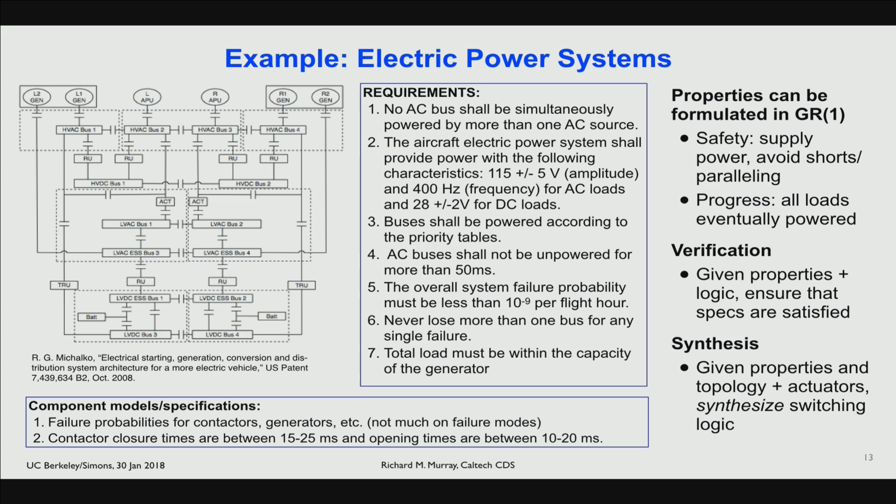Okay, so now let me just in the last 5 minutes come back and talk a little bit about how we might think about self-driving cars. There are a couple of interesting consumer applications where I think these ideas can come to play.

So one is self-driving cars, and I always like to point out to people: think of these as new, but they're not that new. In the 1980s, Ernst Dickmanns was driving self-driving cars around in Germany, and CMU was doing things right at the NavLab. This is one of the early cars that Dickmanns had—a big van with cameras on and other things, and he was driving it, well, the team was driving it on the Autobahn.

Here in California, but in particular at Berkeley and many other places, the PATH project was doing autonomy. This is probably down on the 405 freeway or something, heading down towards San Diego, where they were doing platooning and other sorts of things. The DARPA Grand Challenge I already told you about, that came around in the 2000s, 20 years after some of this stuff was already being done.

And in the DARPA Grand Challenge, there were a lot of teams. Again, these are the alumni who came through and do things, and I already kind of showed you some of the things that happened there. It was really only recently that everybody started getting involved. And so now we're starting to see things, and new techniques are being applied.

So, exquisite mapping of the environment is a standard thing that they do to simplify the problem. Lots of machine learning and other things to classify the obstacles—those didn't exist so much back in the early days. Much more sophisticated optimization and control because you could do more computing.

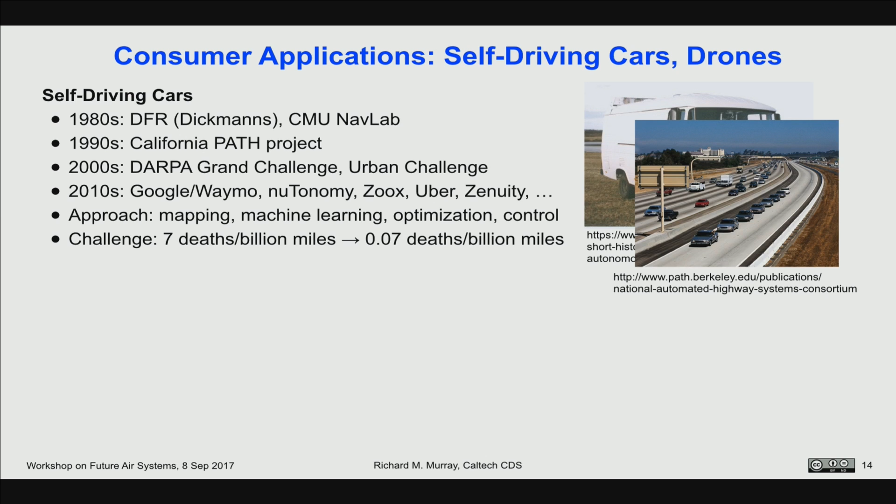So I think the challenge in this area, of course, is how do we go from 7 deaths per billion miles to something like 0.07, and are we there yet, and can we do it? I'll say a little bit more about that.

Consumer drones are another interesting one. Again, drones go way back, sort of 80 years. The more modern things that we see, things like Predator, Global Hawk, the military drones that are there. I was on a study that the Air Force Scientific Advisory Board did where we believed in 2000 that the pilot was optional for most missions that the Air Force flies.

And things like the DJI Phantom—Zexiang Li, who's an alum here from Berkeley, is the chairman of the board of DJI, and one of his master's students at Hong Kong University of Science and Technology, Frank Wang, is the CEO. So very much has a connection back here to Berkeley. They really build on a lot of the advances.

And what people are talking about doing is package delivery, swarms, personal transport, safety critical stuff. Because if you're delivering that Amazon package above the city of Berkeley and that thing falls out of the sky, you got to worry about what happens. So I think there are interesting things to think about there, and people are starting to put funding in there.

It's also interesting to just look at what that ecosystem looks like. There are people working on processors for autonomous vehicles—all of the NVIDIA and others that you hear about are working on specialized processors. There are people working on sensors for doing that: cameras, laser range finders, radar, et cetera. There are people working on connectivity because this wants to be cloud connected and other things. There are people working on the mapping tools for doing this.

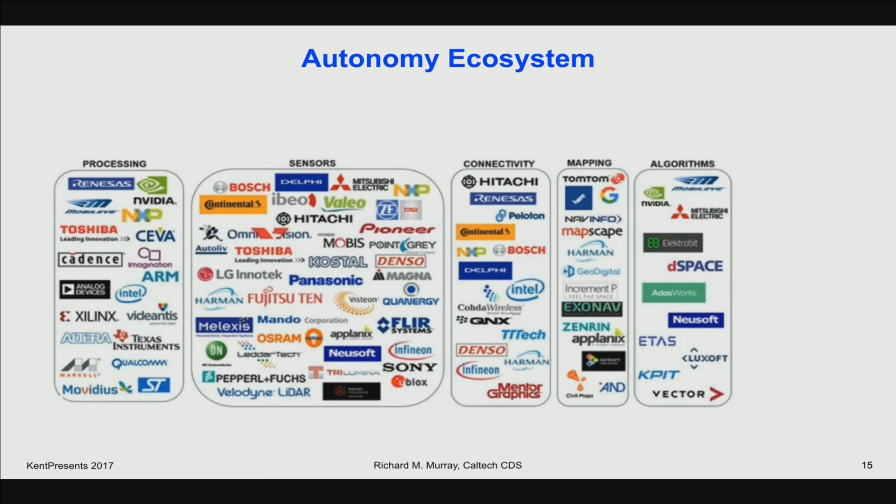There are people working on algorithms to actually implement the planning and optimization and other things. There are people working on the security and safety associated with all of this, the development tools associated with all of this, and then there are people actually making self-driving cars. So this is what that industry looks like.

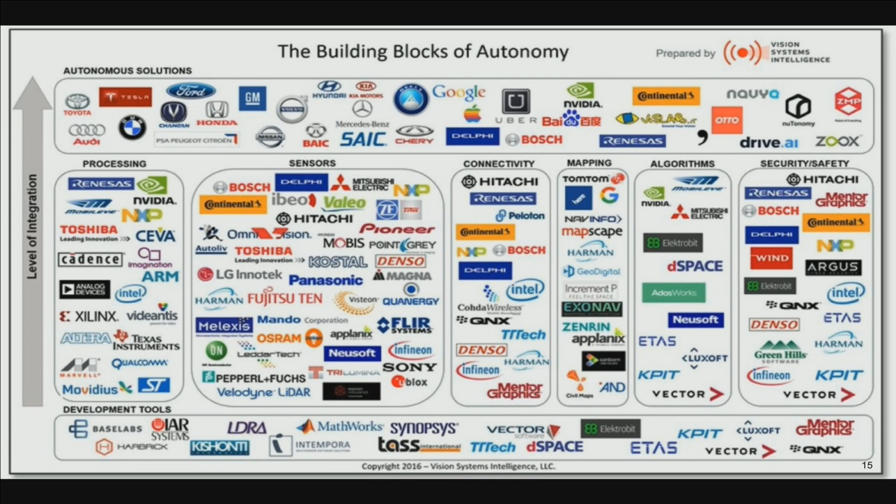There are things we've solved, and there's things that are still work to be done. I think we've basically solved the problem of driving on city streets with normal traffic and everybody obeying the rules. That's solvable. Autonomous cars can do that today. I think we have yet to solve driving in crowded and unstructured environments where people may or may not pay attention to the rules. And so why? Because you have to predict what's going on. You have to understand, when you're in a parking lot, what are the rules of the road exactly? Or when you're on a road that's been blocked and you're making a U-turn in the middle on purpose.

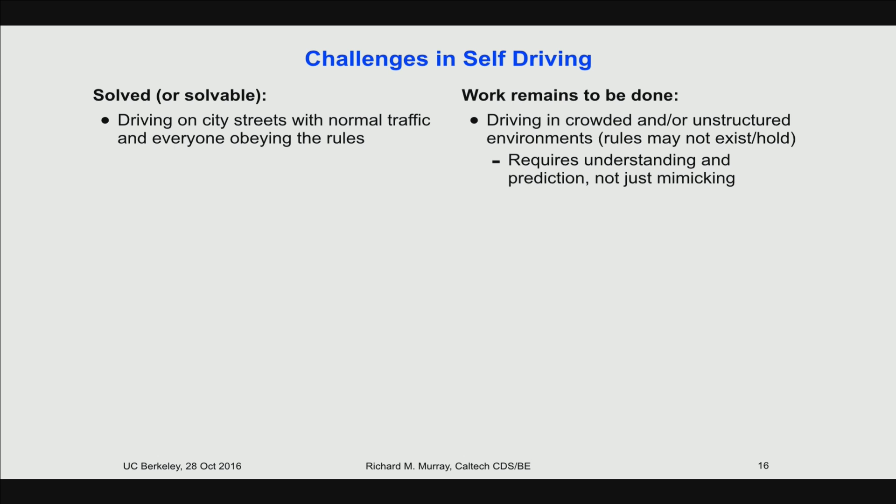I think the other thing is getting accident rates that are on par with humans, right? 1 death in every 100 million miles, roughly. I think that's doable now. The deaths are going to be weirder — you're going to say, why in the world did the autonomous car do that? But it's going to get rid of a lot of the stupid things people do, like paying attention to your cell phone instead of what's going on around you. So it'll be different, but I think we can probably do that.

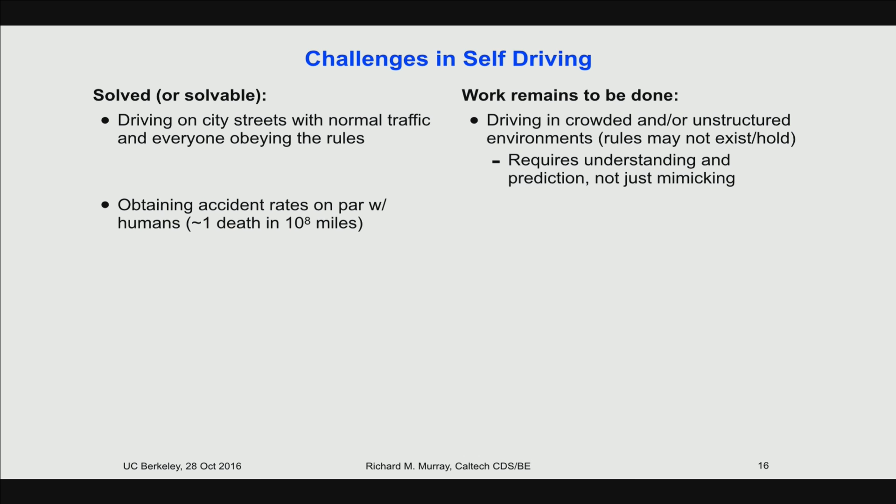The question is, is that good enough? Is society going to tolerate that? My usual argument here is that if 1% of the fleet were autonomous cars in the US, and we go forward 5 years, or 3 years, and we're just this safe, what does that mean? If it's the same rate, there were 35,000 deaths per year in the US — that means we're going to get 350 deaths per year from autonomous cars. That means every day you pick up the San Francisco Chronicle, or the New York Times, or the Washington Post, and it says autonomous car kills child in Michigan. The next day you pick it up and it says autonomous car kills elderly person in Florida. And as a society, I think we're going to say ban autonomous cars, they are killing people.

Now, they're not killing people any more frequently than people are killing people. But our engineered systems have to be better. So I think we can do this, I just personally don't think it's going to be good enough. You can decide what you think. But I think getting 10 to 100x better safety, that's an open problem — that's well beyond the mean time between failure of the parts.

For example, you have to operate in the presence of failures. You have to operate with flat tires, with engines going out, with your sensors going nuts, all of that stuff. I think we can do things where 99% of the miles completed are done in self-driving mode — we see that already. That's different than saying 99% of the trips are completed, because there's a lot of hard parts that occur on a trip, and that's what you care about as a consumer.

I get into the autonomous Uber and I get there 99% of the time — I don't care that it's 99 out of 100 miles. I've probably been 100 miles in Uber cars in the last month. If every month I've got an Uber car that breaks down and then I have to do something, that's a problem. So you really want 99% of the trips, because I haven't taken 100 trips — I've taken maybe 10 or 20 trips.

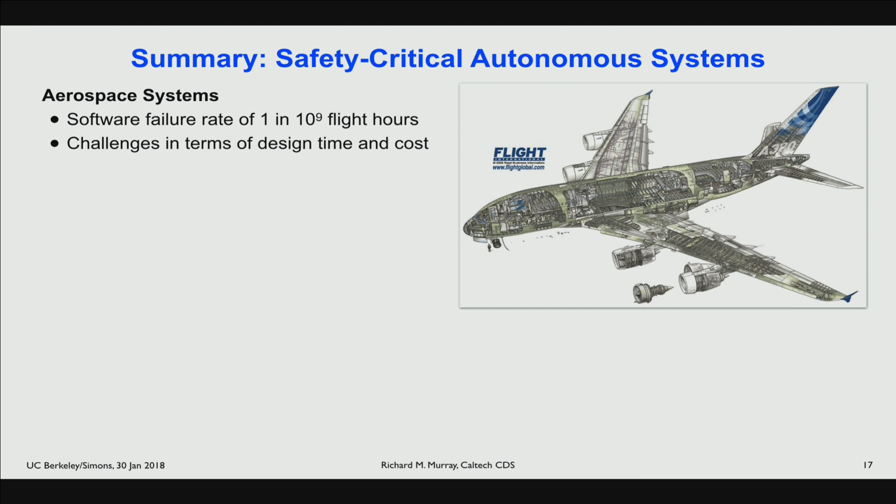Okay, so I've gone a little bit long—let me stop there. I hope I've told you about aerospace systems and some of the ways people in aerospace think about what's going on. I've told you about some of the formalism that our group and others are using to manage the complexity of these systems, and I've said a little bit about self-driving cars and what needs to be done there to really move forward. With that, I will stop, thank you for your attention. I'm happy to take questions. Thanks.

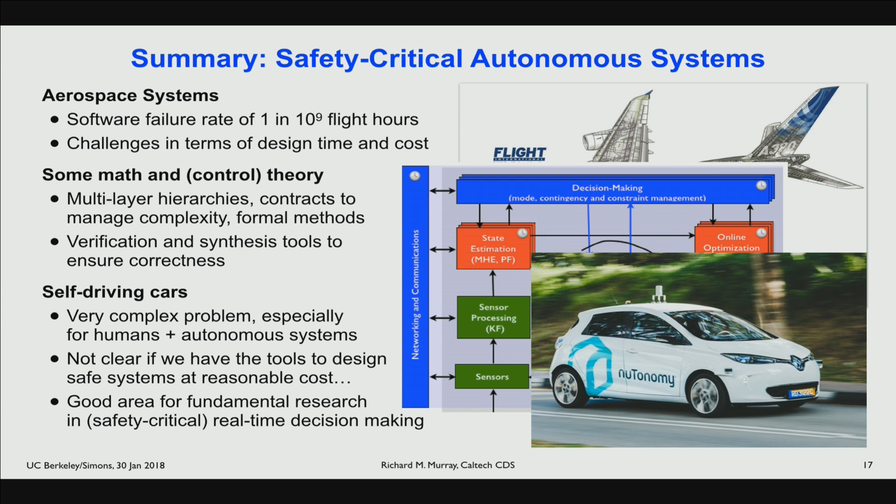Yeah, in the back. What's the basis of the claim that the problem can be solved now, at least reaching human level of safety—given the fact that it's 1 in like 7 billion, this includes all the world, including the dangers of fog, country roads, snow, ice, and so on?

Yeah, no, that's a good point. So maybe I should rephrase that. Somebody calculated that it requires driving about 4 billion miles, randomly selected and so on, to show there's like a 20% improvement.

What's the basis? Yeah, there's no formal basis for it—I'm making it up and just claiming, right? But here's what I'd say: I think one of the things autonomous cars can do is say, I'm not qualified to drive in these conditions, and I won't. It's snowy outside, and I'm not qualified to drive in snow.

By the way, people are driving in snow. nuTonomy tests in Boston drive in snow all the time. People drive in rain, on dirt roads—all of that, in some sense, you can start layering in. But what I think they will say is, in this situation I don't have a map, or my connectivity's gone down, or too many of my processors have failed—I think they will stop. That's part of how we'll get there.

Now, we may not tolerate that as consumers—because I get in this thing and it just says I can't go, right? But even when we were doing the DARPA Grand Challenge 10 years ago, I was convinced that we could drive pretty safely with that vehicle at the time. If one of our processors failed and it mattered, we would simply pull over to the side of the road and stop. So again, it's not anything rigorous.